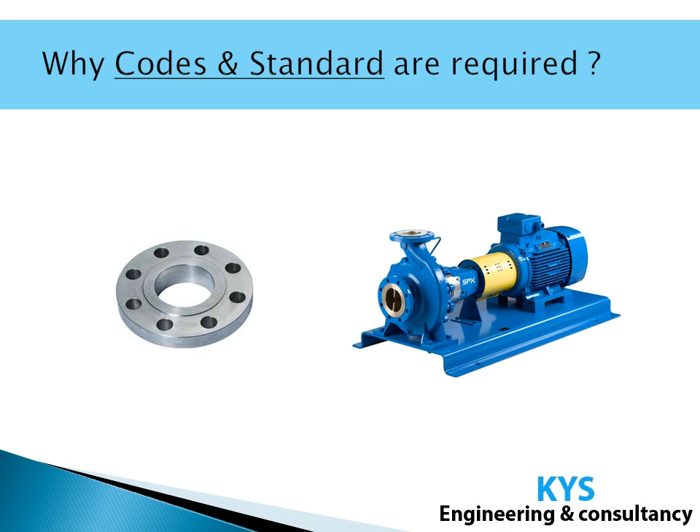First, let us understand why codes and standards are required. Suppose we have a pump supplied by a vendor from USA, and the connecting flange to the suction and discharge nozzle is by a different vendor from India. The flanges will fit to the pump only if the pump, nozzle flange, and connecting flange are manufactured as per the same codes and standards.

Let us have one more example. Suppose we have a PSV which is to be tested. The question again comes about the testing procedure. There must be predefined guidelines for testing which ensure safety along with reliability and acceptance to the client. This all comes through codes and standards, which provide the defined guidelines for testing of a PSV.

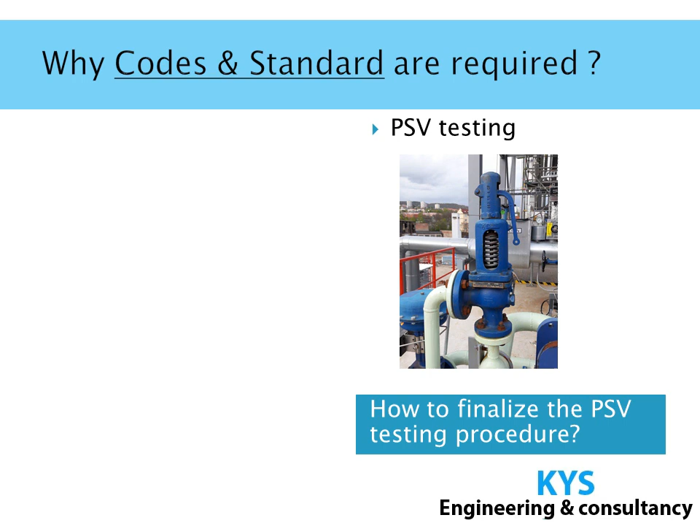Again, if we have to buy pipe fittings like elbow, tee, nipple, or branch connections like weldolet, the question comes about how to put our requirement in the market for buying. Here again codes and standards provide the information we can put in the market, like pressure rating, thickness, end connection type like plain end or bevel end, and other dimensional details.

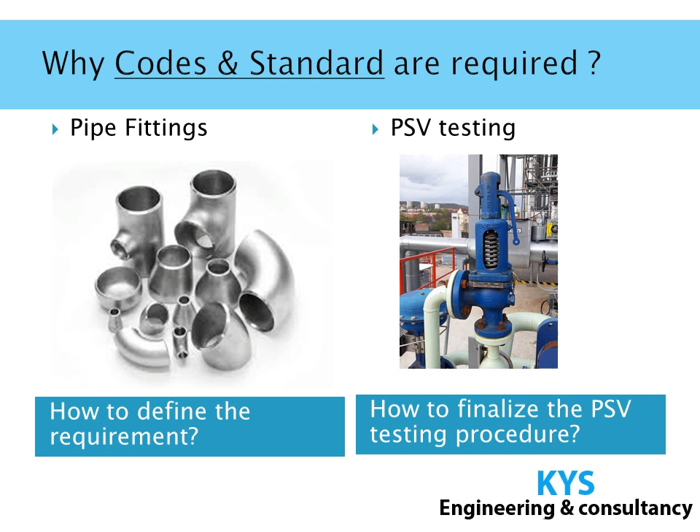So codes and standards actually standardize the process or product, whether it is PSV testing or manufacturing of a product. If we do not standardize the process, procedure, or product, manufacturers will manufacture as per specific customer requirements, which will fit for one customer but not for another. To customize manufacturing as per a specific customer takes a lot of time and becomes a costly job.

Manufacturing of the same product will have different specifications or types by different manufacturers, which may fit at one place and may not fit at the other. The interchangeability of the product will not be possible, which was the case before standardization.

So if we define standardization, we can say standardization is the process of implementing and developing technical documents based on the consensus of different parties that include firms, users, interest groups, standard developing organizations, and government. These technical documents become codes and standards. The important point to note here is that there is a consensus of involved parties during development of the technical documents.

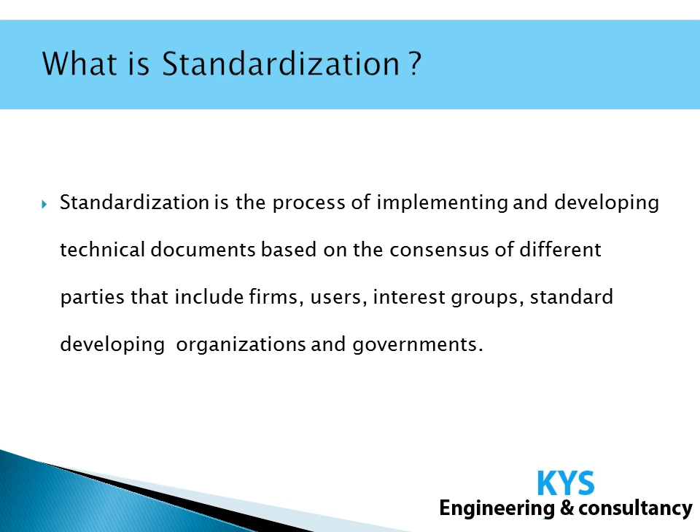Let us see what standardization does. It brings uniformity across the world. It reduces the cost of doing an activity due to clear guidelines defined in codes and standards. It adds ease to doing business and makes it more safe for the world. All these are achieved by implementing codes, standards, and recommended practices. There is a new term here, recommended practices. We will see what this is.

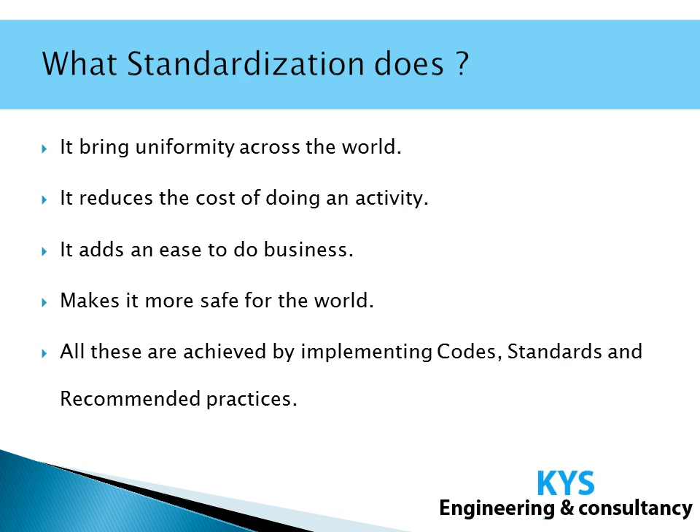Now, if we classify these technical documents in general, there are three types: codes, standards, and recommended practices. Industry standards are published by professional societies, committees, and trade organizations. It is not just by anybody. Now let us see the definition of these.

Codes: a group of general rules or systematic procedures for design, fabrication, installation, and inspection, prepared in such a manner that it can be adopted by legal jurisdiction and made into laws. The important point to note here is that these are legal documents with legal foundations.

Standards: documents prepared by a professional group or committee which are believed to be good and efficient engineering practices and which contain mandatory requirements. So the main difference between codes and standards is that there is no legal foundation in standards, but in codes we have legal foundation.

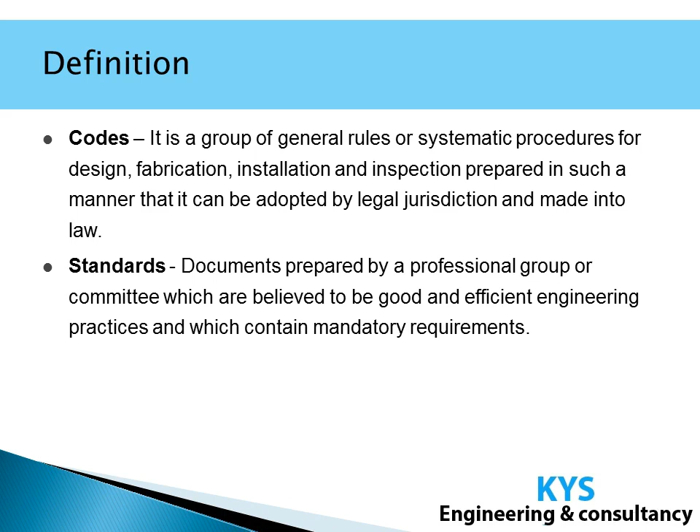Recommended practices: these are technical documents prepared by a professional group or committee indicating good engineering practices, but these are optional only.

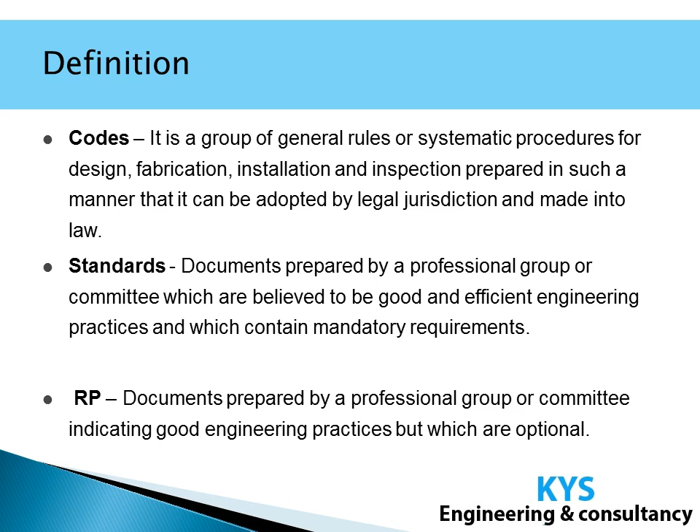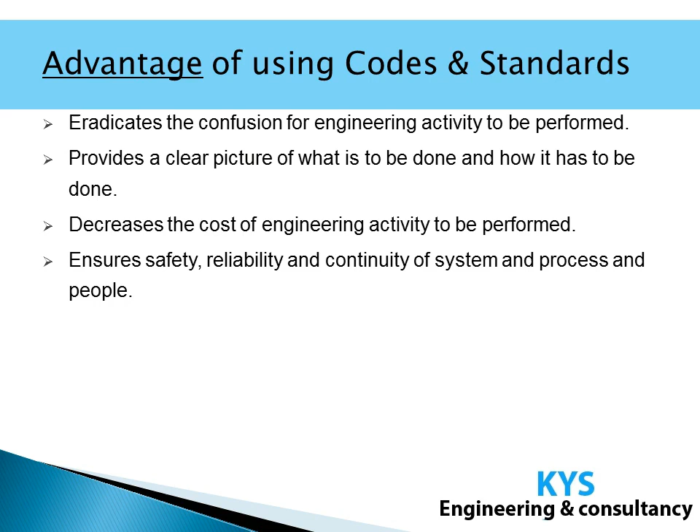Now let us see the advantages of using codes and standards. It eradicates the confusion of engineering activity to be performed. It provides a clear picture of what is to be done and how it has to be done. It decreases the cost of engineering activity to be performed. It ensures safety, reliability, and continuity of a system, process, and people, because these codes and standards are prepared considering a lot of safety, reliability, and continuity issues.

It minimizes mismatches and promotes interchangeability. It reduces the cost of inventory and ensures market availability of material and process in less time, because all manufacturers are on a common platform due to codes and standards. Also, cost of inventory is reduced because if one manufacturer is not supplying, we can go to another manufacturer and get the same product, since both manufacturers are manufacturing as per the same codes and standards.

It helps in continuous growth of system and procedure for the future, because once a code or standard is prepared, it is revised time to time considering new aspects of design, new safety challenges, and solving new problems. It helps to avoid reinventing the wheel again, because if we already have something available in the form of codes and standards, there is no need to start from scratch.

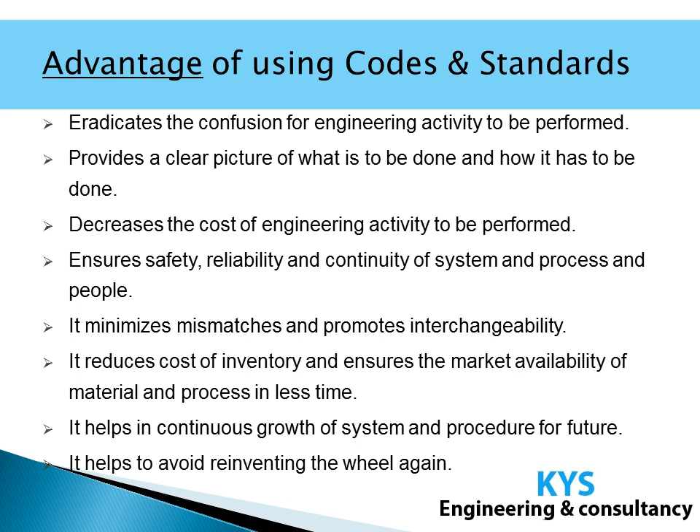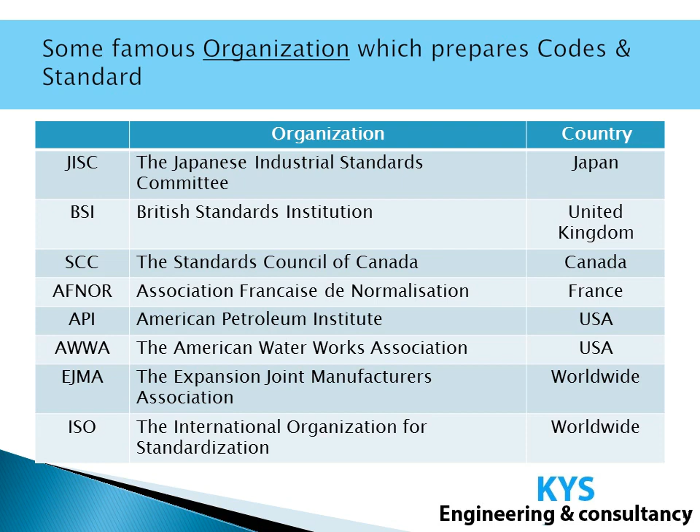If we broadly classify standards for piping components, there are three categories: standards for material, standards for dimension, and standards for testing. For material we have ASTM, DIN, JIS. For dimension we have ASME, BS, JIS, ISO. For testing we have ASME, API, DIN, ISO.

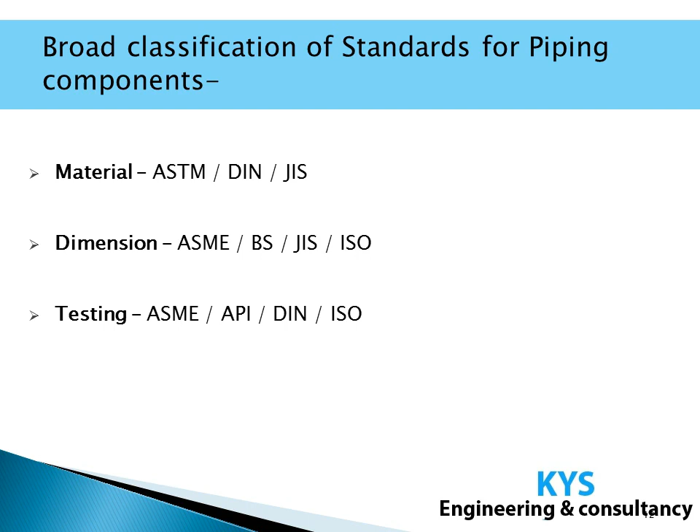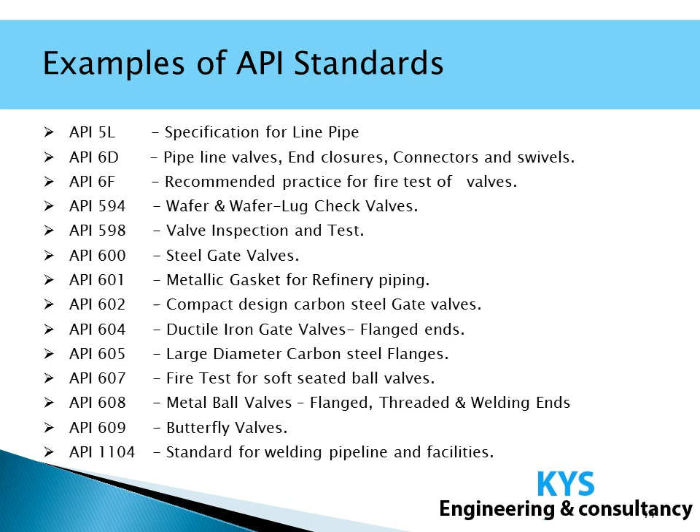So this was in brief about codes and standards and their advantages. See you in the next video. Thank you very much.